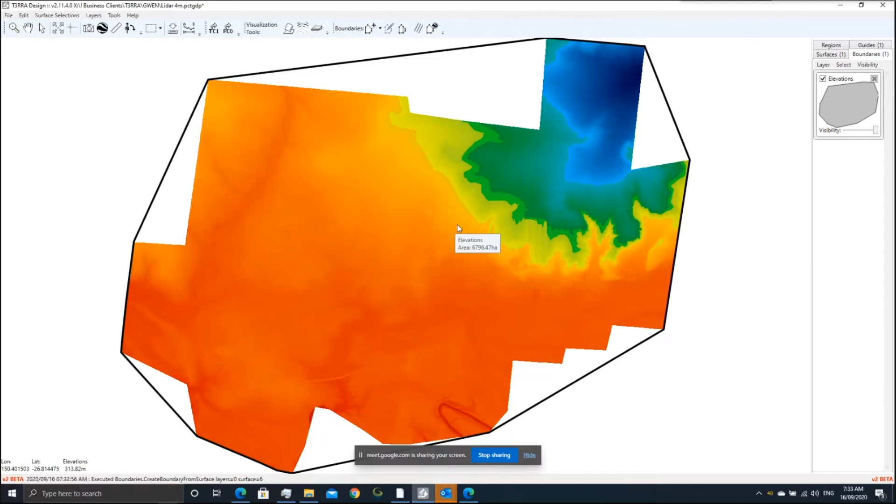So that's actually about 7,000 hectares. This is a large piece of data, and as you can see, the thing we find handy with LiDAR data compared to tractor data is that it has absolutely everything.

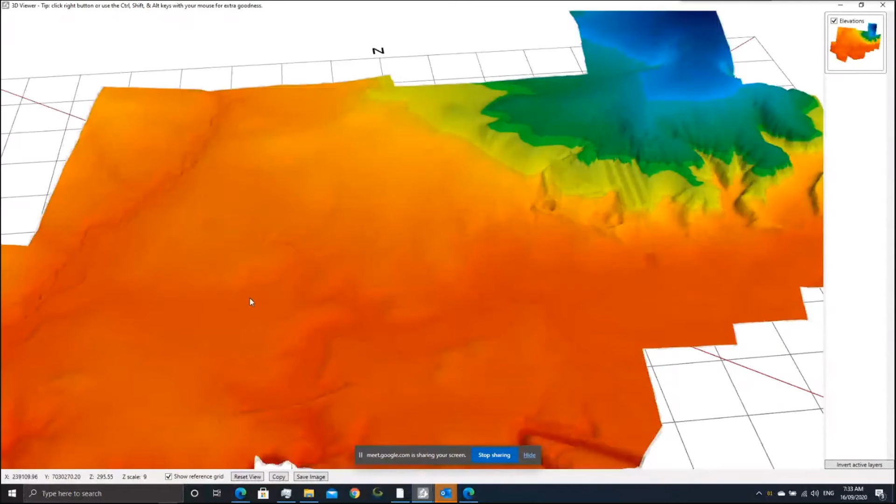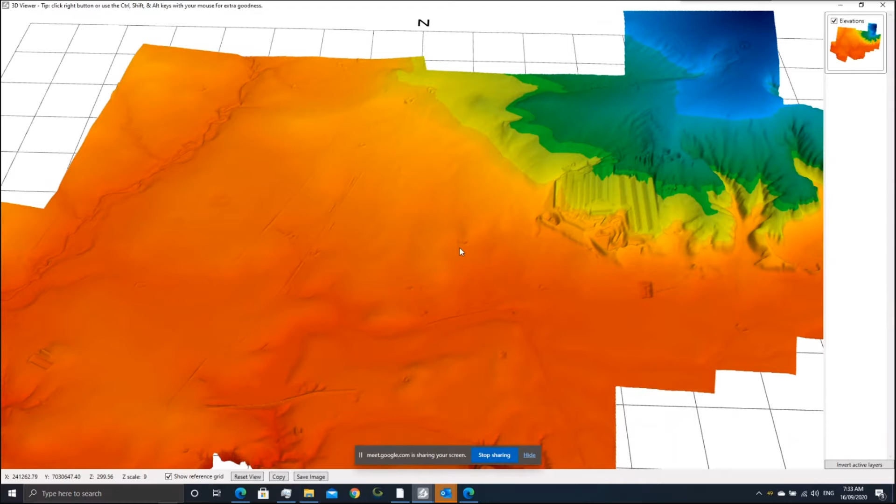And in the 3D view here, over on this side of the hill there's a feedlot, and you've got bits of creek in there. We're not constrained by edge of paddock to edge of paddock, particularly when we're working with the drainage side of farming. Having a complete picture, not just pieces of it, is really valuable to how we look at things and how we work with them.

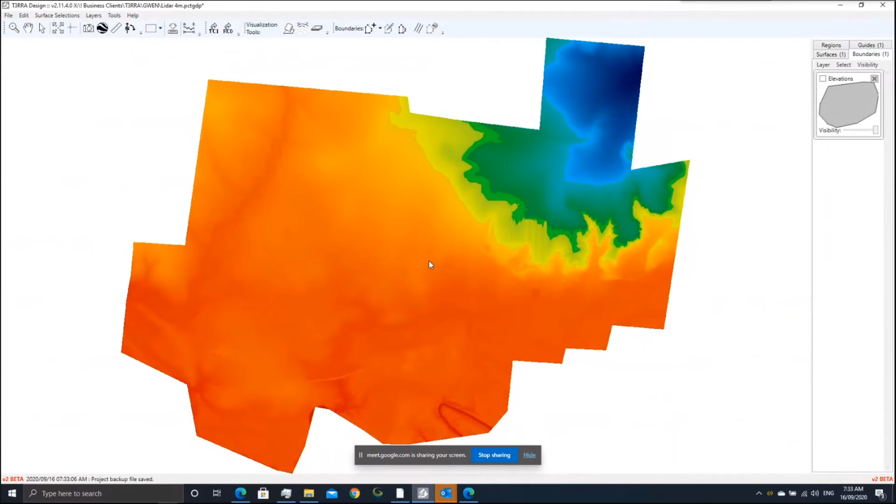But today I'm building a dam, so I'm going to take this across to Google Earth. With the Google Earth tool in here, it doesn't matter what I call it because we're just having a quick look. It takes me to where we are. And the reason I'm picking this is they have a gully dam existing, but it doesn't have enough capacity.

So we're looking at a site around this gully dam to increase water holding capacity on farm. The first few things when thinking about storage is T3RRA Design makes it deceptively easy, but there is a lot to think about. On this site, if I'm looking to build a dam, I want something that's close, with the least amount of pumping that I want to do.

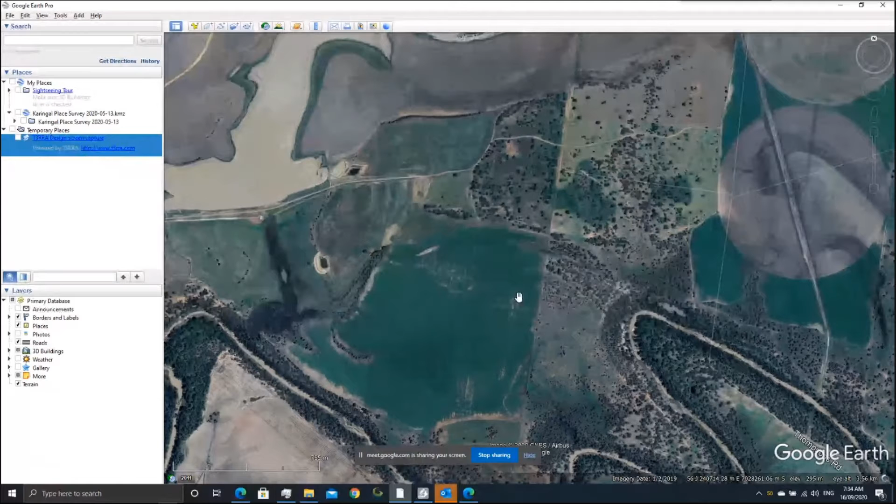But what's most important is probably the soil types involved. On this particular site, you can see this hill, it's a sand hill. Over here, we're going to do some electromagnetic survey to test the types of soils that are through here to see if this is a reasonable site.

We're going to test this to see if it's a reasonable site, and it's down in the valley here, and it's some better clays than up here in the sand hill. But we want to make sure that down through the profile is clay that's going to hold the water and not sand.

And our other potential site that I'm going to use as the example today is here. The reason this one is a potential site is it's close to where our water is, and it's a large enough area. With smaller areas, you get caught up in how much you can potentially hold, and that's for a few reasons, which I'll talk about as I take this into design.

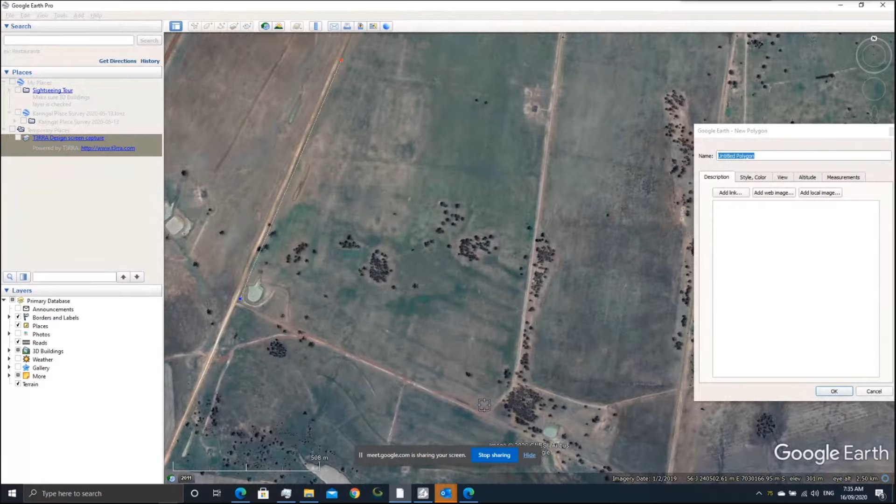So one of the things we can do with T3RRA Design is, I can say this looks like a good area and draw a polygon in Google Earth. That looks like a structure, so we're just going to go around that. I don't really care about the existing turkey's nest because we're just going to earth move straight over the top of that.

So this is my potential storage area. I'm going to save this place, I'm going to save that polygon to the desktop.

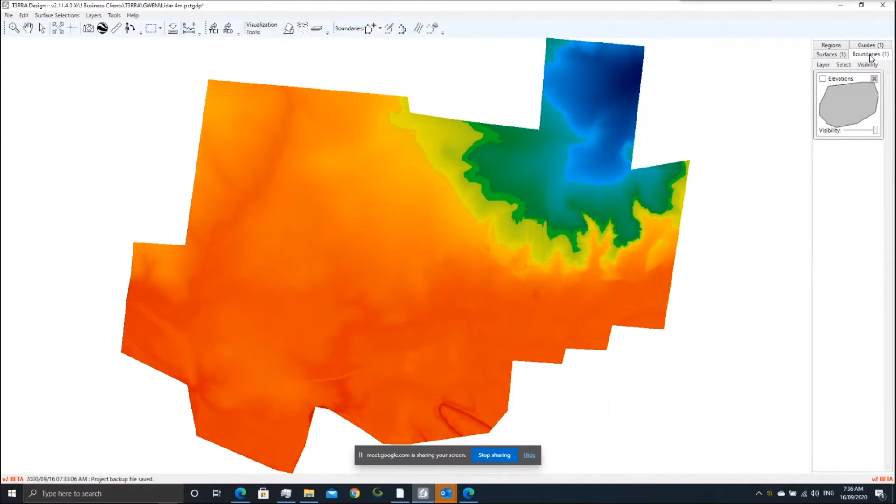And when I go back to T3RRA Design, in the boundaries tab, because I want to use this as a boundary, I can import this layer as a KML. I've saved it on the desktop, so it's easy - dam1 - and I get a nice little boundary of the area I wanted to cut out of my huge data set.

When using big data sets like this, it's really handy to be able to cut smaller pieces of data out, because it just makes everything run a lot smoother. So with the surfacing tools, there's a duplicate surface. We're just going to go to the boundary, cut out my piece of data, and there we are - I have a smaller set of just the area I want to work on, nice and handy here.

In the guides, I'm going to use the contour tool to have a look and just get a feel for my site. The color is one way to get a feel of your site in T3RRA Design.

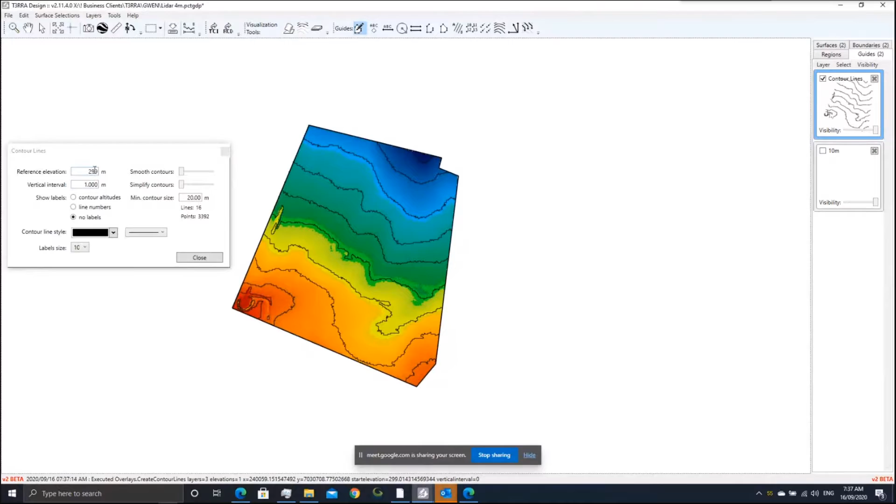Contours are a really targeted way, because I can sit here and be fussy with colors, but I can count here. These are 1 meter contours. So I know that over my potential site, I've got 1, 2, 3, 4, 5, 6, 7 meters of elevation change. Now this is a lot for a single dam site. This is no longer looking like a dedicated ring tank. This is looking like it's going to be a gully dam with a very large wall on this southern side where the elevation is lowest, and backing off back to pretty much ground surface over here. So I'm going to look at nearly no water up this end and 7 meters of water if I get to up here. So that's just something to keep in mind. The contours just give you an idea of how things are going to look.

So now I'm pretty much ready to start on the actual dam tool. It's this one. It's a fairly new tool. And you start just by making the area.

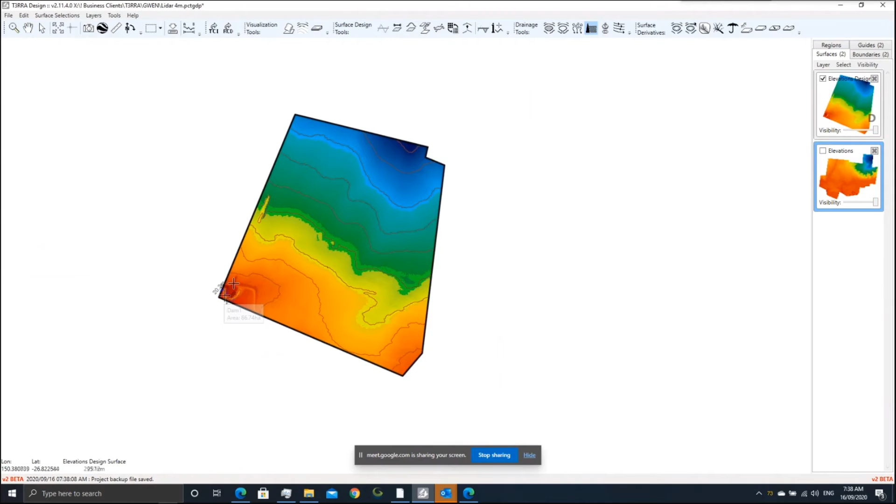So I'm going to step in a little bit from my boundary, and trace where my dam is going to be. And of course, before we get to this stage, we've had a good think of, we've investigated the soils for their water holding capacity and for how acceptable they are as a dam wall building material. We want a dam wall that's going to lock water inside, lock up tight, but also not erode or have a chemical imbalance that's going to let water tunnel through those walls.

Now that I've connected that line, I closed it there when I came back to my first point. You can create a full cut dam, which is a full flat borrow, or we can create a borrow pit dam. I'm going to do a borrow pit dam today.

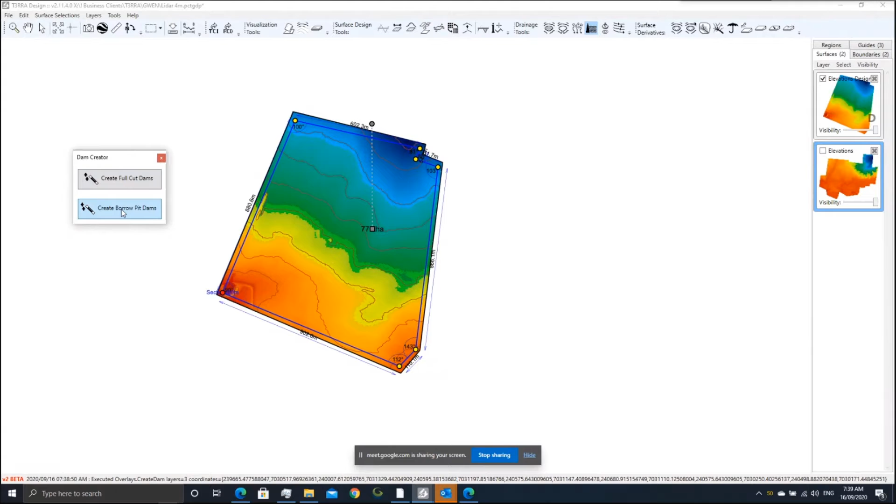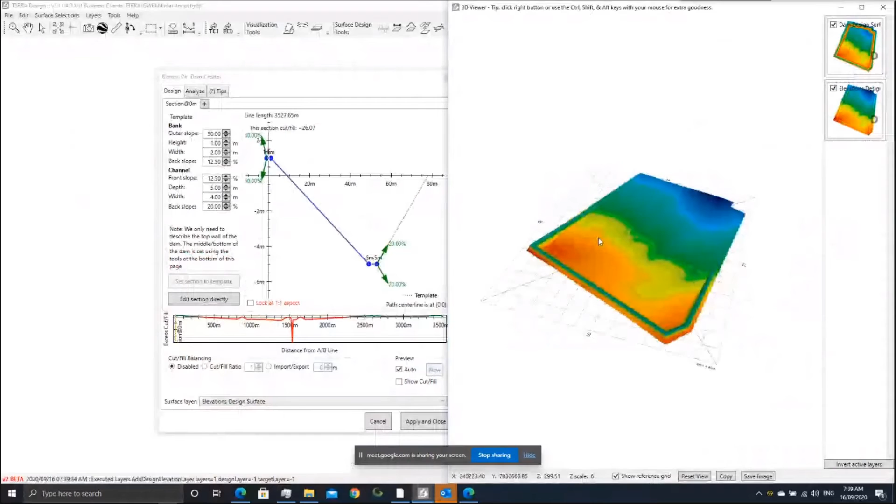This is our dam creation window. There's a lot going on here when we first open it up, but we'll simplify that as I go. I also want, today I'm going to have the 3D open on my second window, just so you can see, I guess, live how using this tool changes what the things in here are doing to our actual design. And I'll turn off the original.

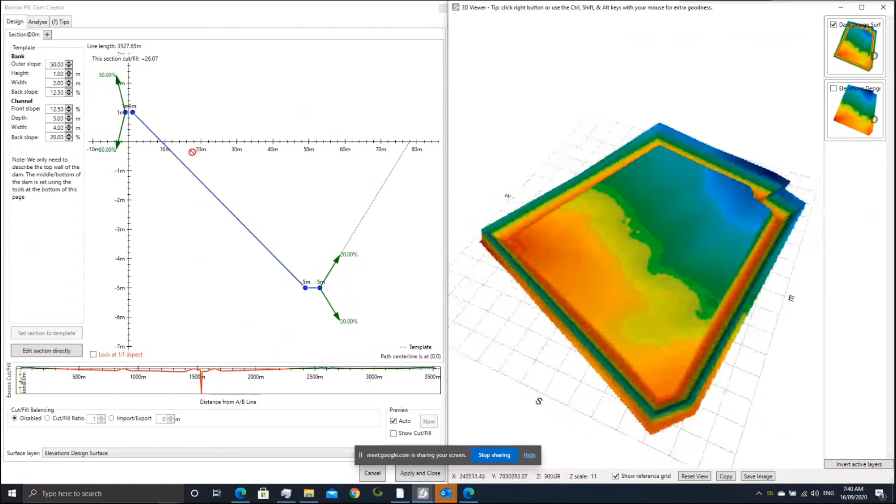Some of the places to look on this: this is a cross section. So if you're looking down the wall with the wall and the borrow pit, this cross section is modeling that roughly of what's going on, and it's giving us a few details. This section is at 0 meters. So if I went back to my original T3RRA Design screen, it puts a little yellow line in here and it shows you where that section is.

And so I can add extra sections and put those at a new distance from our start, if our start is 0 here. So I might put one at 300 meters and I get a new section at 300 meters show up.

But today I'm just gonna put one. I'm gonna put a few sections. So on a bigger dam, that doesn't have such an elevation change, I might only use one section to model one type of wall. Because I'm having this dam where this wall along the southern side has to be a lot higher than the dam over here, I'm going to model a few different sections of wall. So it's going to give me a chance to show you the tools across a few different sections.

So I'm going to put one. You can see that's coming up around here. I want it more up here. So I'm just going to today play with this a little bit to get it. There we are. That's roughly where I want it.

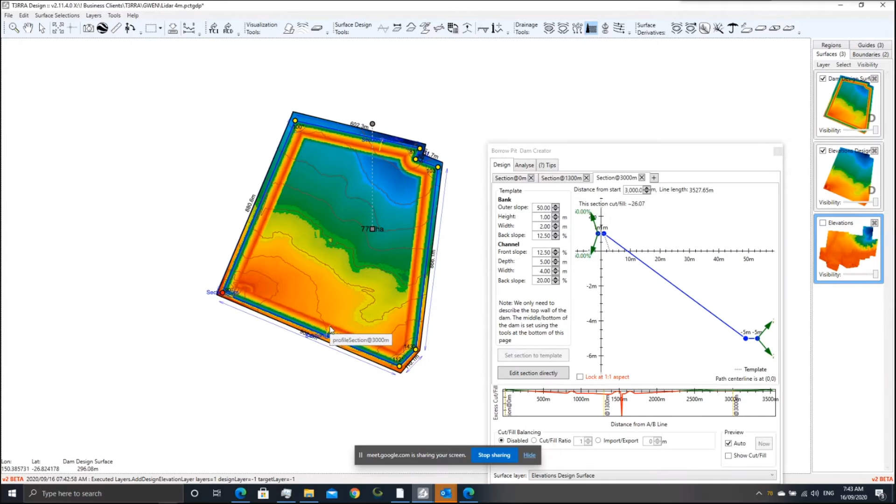There we are. I've got a section at the top, which is going to be the peak of my borrow pit, and I've got a section at the bottom, which is the base of my borrow pit.

Now I'll talk a bit about the template of each side and the things to think about. The outside slope on a lot of dams isn't the big consideration. We want enough here. Some farms might have a safety aspect, so you might take that back to something that you're not going to roll a ute down. But for the most part, a 50% outside batter is enough.

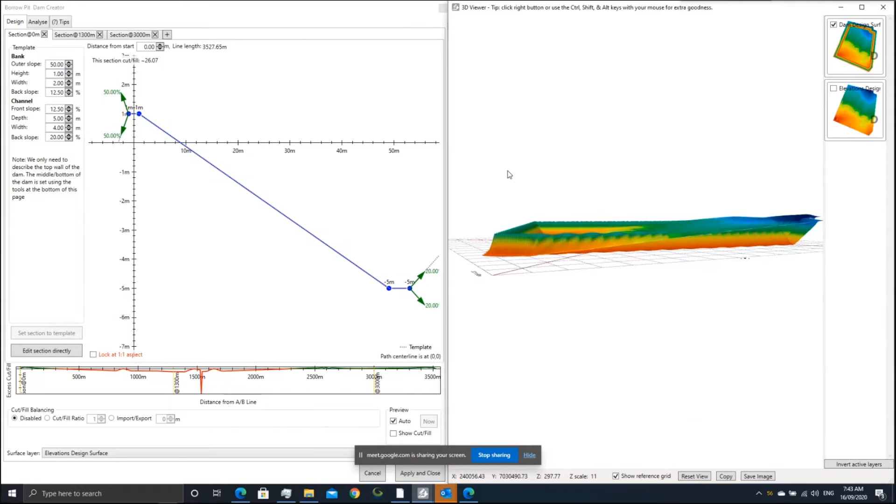Our height on this is one of the difficult things to have a guess at. It's easy on a flat floor, but on this one we've got to get the height at the right point above natural so that we have a consistent height the whole way around.

There's been an update in T3RRA Design. There's a few tabs here: the design, analysis, and some tips. On the analysis side, we have what our zero height is, at 301.08. You can see on this cross section at 0 here - how do we know what 0 is when we have a really sloping site?

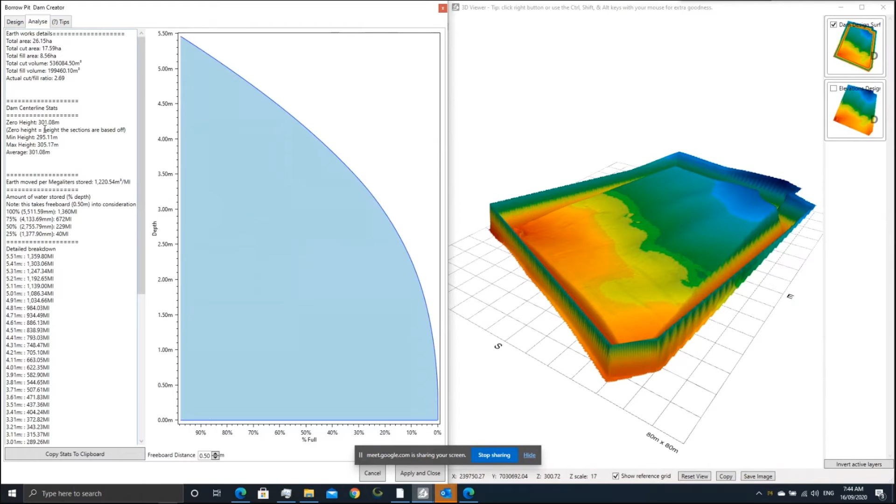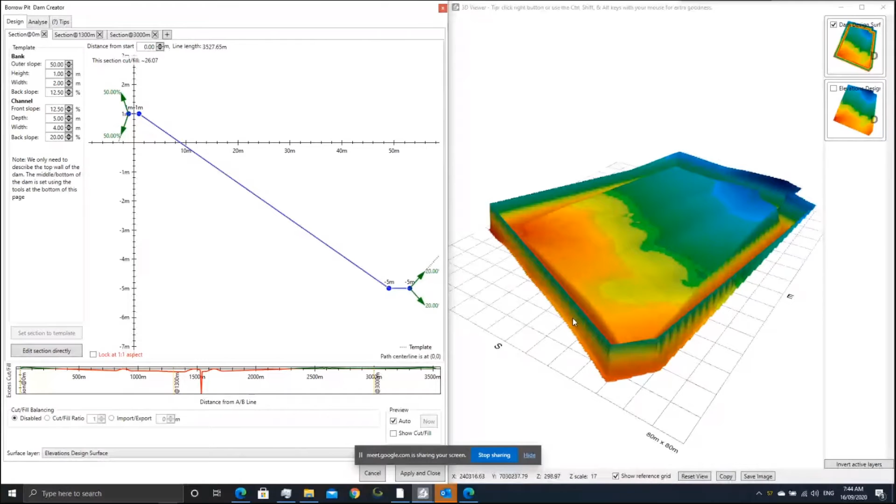That's done for us through this analysis side. Because zeros can be anywhere, but for the purposes of Terra Design, it is the average height of the line that you first put in, which is not something I can probably do off the top of my head just by looking at an image.

So it's been a helpful addition. We're going to start with 3 today and see where it takes us. Each section is its own section, and each section uses that same 0 height. So 3 meters, even though we're 7 meters higher, is the same height as 3 meters even though we're 7 meters lower. That's why it's a relative level and a frame of reference for our cross section, and that's why it can get a little tricky when trying to think on these steep slopes.

Width of the top of bank - width is a consideration on smaller dams as far as what kind of vehicle you're going to drive around the top of it, and less so for holding water. So you might think of a vehicle width, 3 meters, 10 foot, to drive a ute around. As the dams get larger, you have to take into account the wave action that's going to be crashing near the top.

You have to take into account the phreatic line of the water - that's if this dam is full and that water is slowly working on seeping through the bank. The angle at which it seeps through, and a wider bank pulls that more back towards the ground surface so that we don't have seepage. So for smaller dams, the consideration is mainly trafficability.

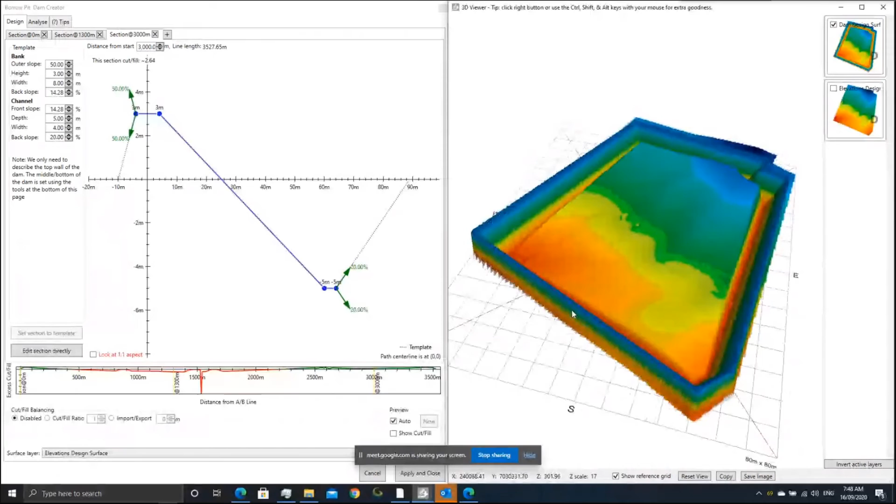We can choose the depth of that channel, and as you can see, it's quite a deep channel at the moment with 5 meters down there. The main consideration with this borrow channel is the section cut fill. At a 2.64, we've got 2.64 times the amount of cut than we need to fill, so it's about bringing these back to reasonable values.

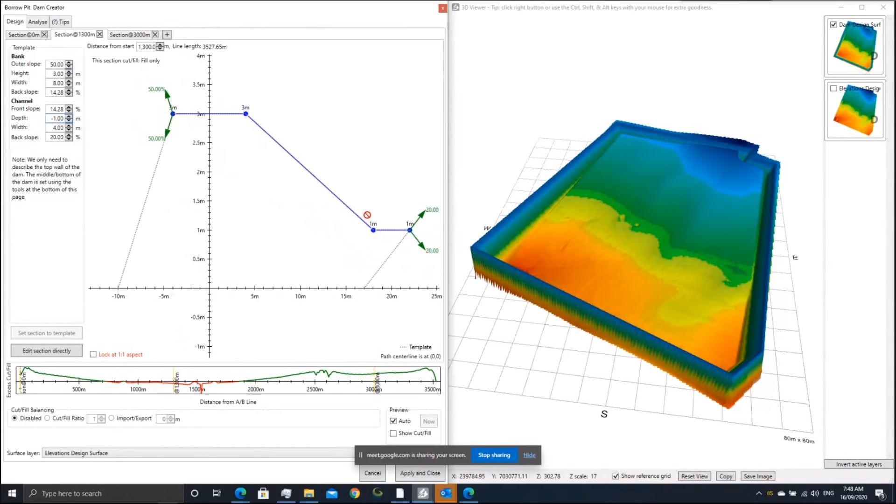And this is a new one because it looks confusing, but we still have a borrow pit up here because the natural surface is above our 0,0 frame of reference. So even though I have a negative depth, my borrow is still a borrow.

That's where it can be handy to have the 3D view. You can now see that my borrow is back on natural surface here, and that I have a slope on it from top to bottom so that it drains to here.

So that's the main tools in here. You have the ability to have sections around, so we can vary our dam on these. We have the ability to choose heights, widths of that top bank, slopes appropriate to the size. Smaller dams don't need the same inside batter—it might just be a small surge dam where there's not water often, and it could be a 3-to-1. By the time we get to some really big dams, you want to roll that right out to an 8-to-1 so that the wave action on that storage isn't eroding away at that wall.

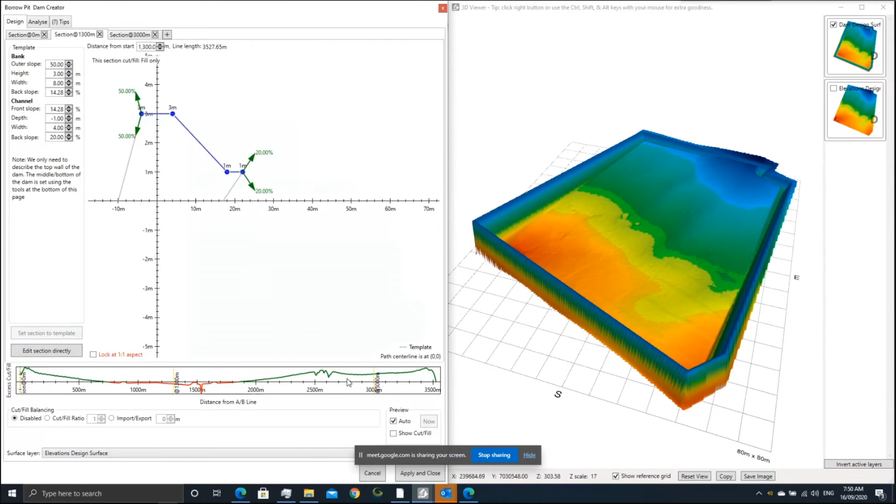We get the excess of cut fills, and at the moment we don't have an estimate on that page of the full cut fill, but we do on the analysis. So we get to this point, and because we're on a large dam with wave action, I'm going to take my freeboard—that's the distance that water is going to be from the top of the dam, to 1 meter. And that's important because of the fetch length on this.

But we get some details, so we can see our total cut, total fill. I'd need a lot more cut, I'd need to work on that borrow to get things stored.

But we can start looking at how much earth we move per megaliter. If you know your earth moving costs, you can now get a handle on how much you're costing per megaliter to build this storage. So it's a relatively quick tool, and that's a really valuable decision-making tool.

We can do all the investigation, but if it's a bad site and the size of the walls versus how deep the borrow isn't making sense with the meters per megaliter, then we just go and move sites or change the goalposts to make something that works.

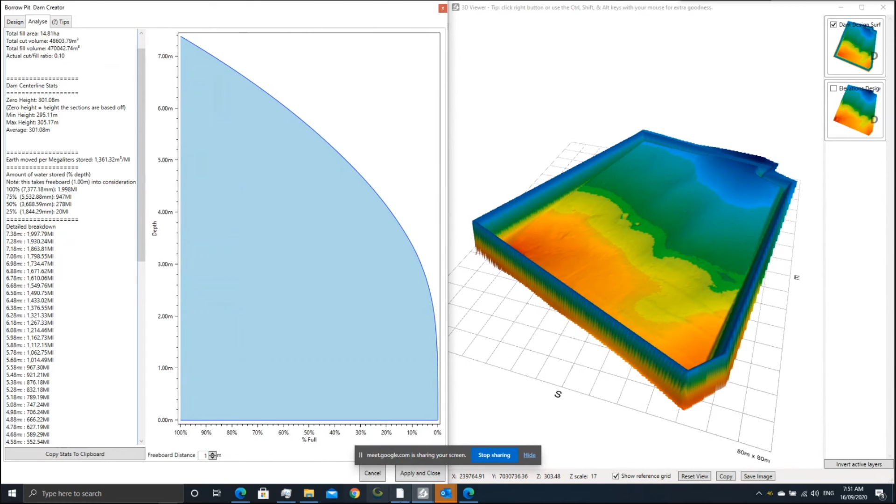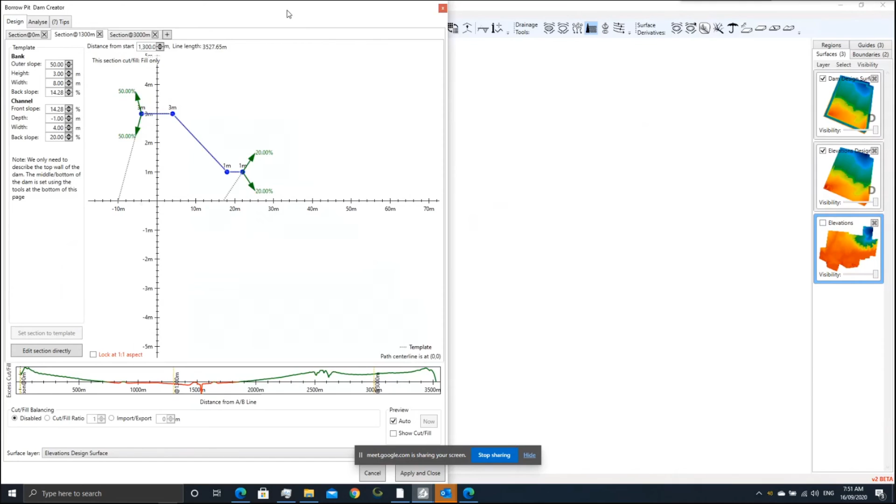And we can see that we have a rough idea of the megaliters at different heights in the storage. At that point, that's our dam—it's made its surface. It's finished, and that's ready to build a machine control file.

We can do all the normal tools. If I actually make that a base surface that you can compare with other surfaces, we can get cut fill maps. We can put that straight to, if it's the right design, put it straight to machine control and build it.

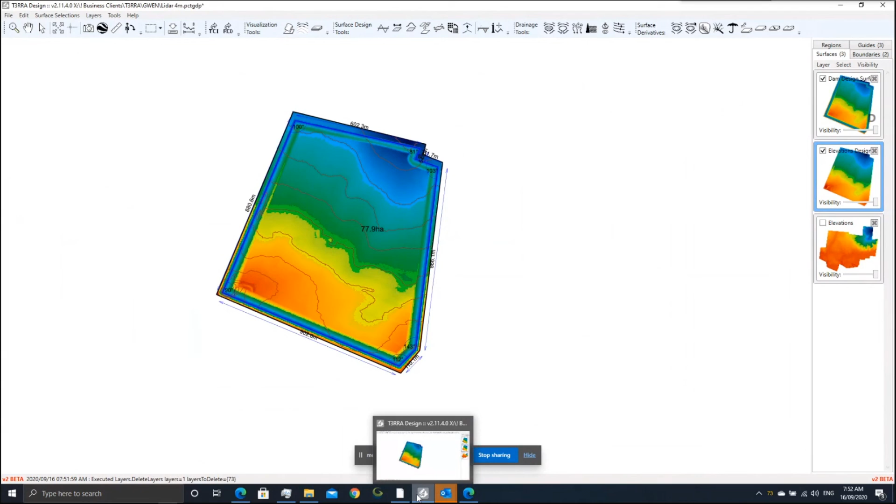James, is there anything else that you want to just touch on there? That's all. No, that's all right. I will move on with the presentation.

Okay, so thank you, Andrew, for the run through on the dam design tool and some of the considerations. It is important, if you jump back early in your presentation where you talked about analysing soil types and taking into consideration for building a storage—it is very important for people who aren't engineers, who aren't regulars in building storages, to consider a lot of variables when building storages, and potentially consult with an expert, because soil types, regional constraints, and standards need to be met. There's a lot of things that should be considered when designing storages and dams, so everyone should keep that in mind.